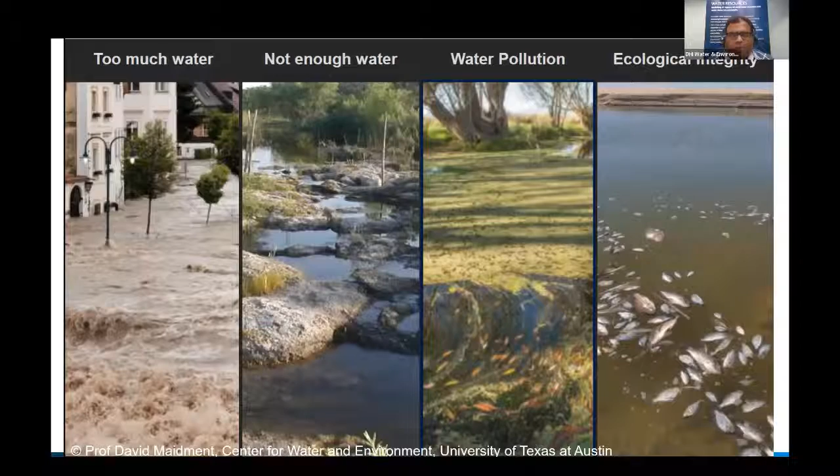There was even a study done in the USA where they found that cities generate about 10 trillion gallons of untreated stormwater - that's in liters almost 37 or 38 trillion liters of water, which is making its way into our receiving waters. All of this is untreated, entering our receiving waters. So there is a lot of pollution and contamination in our receiving waters, and we really want to do something about it.

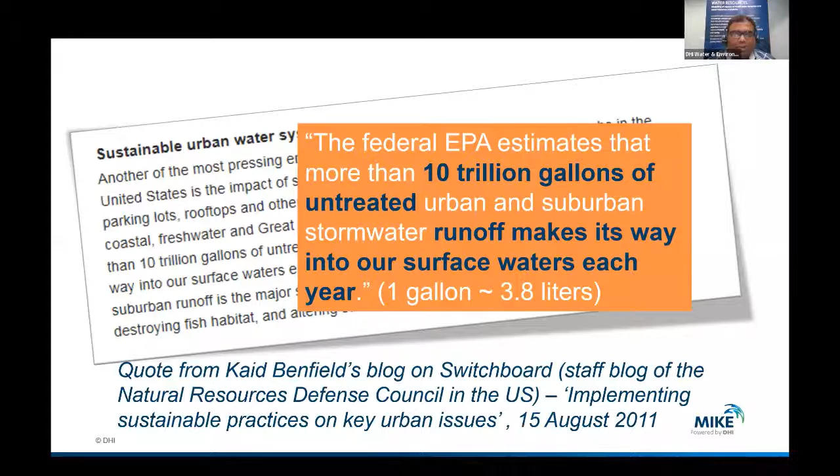That's what the whole topic is all about - what can be done to mitigate or reduce the amount of contamination entering our receiving waters. So when we talk about water sensitive cities, the term or the origin, we should go back to this particular framework. Many of you might be familiar with it.

For me, this has been very helpful when I started out working in this aspect of water resource management. Earlier, I was just looking into water quality and trying to do data analysis and modeling. But when I started looking further into where does water quality fit in the water resource management framework, how does it fit into managing city waters along with the green infrastructure assets, this was very helpful.

Over the past 10 years, whenever I have given presentations to ministries or even ministers, having this kind of framework gives a context to help them identify where their city or town is. In a few presentations I attended during conferences over the past 2 years here in New Zealand, I've observed that MFE keeps hinting that most cities in New Zealand are somewhere between drained city and waterway city. But what exactly are these 6 different city stages we are talking about?

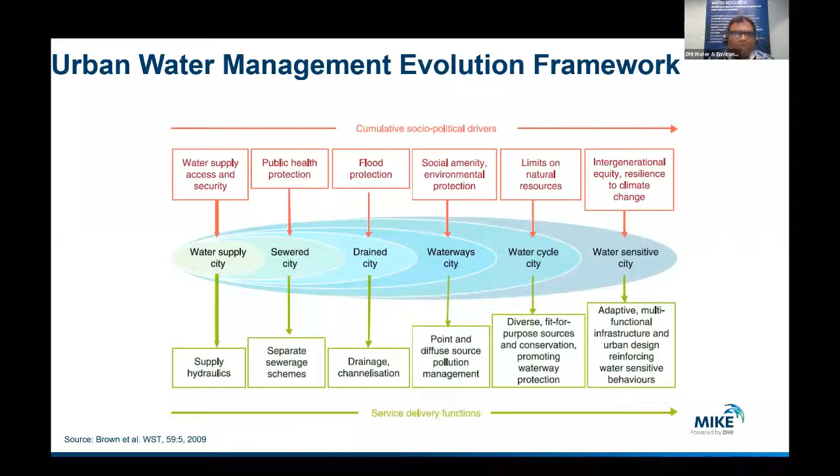Just to give context to those who are not familiar with this particular concept of urban water management evolution framework: we all start with a water supply city, in the sense that from villages, when we moved into cities, we need to supply water to all the residents living in the cities. That's the first focus. We have to supply water.

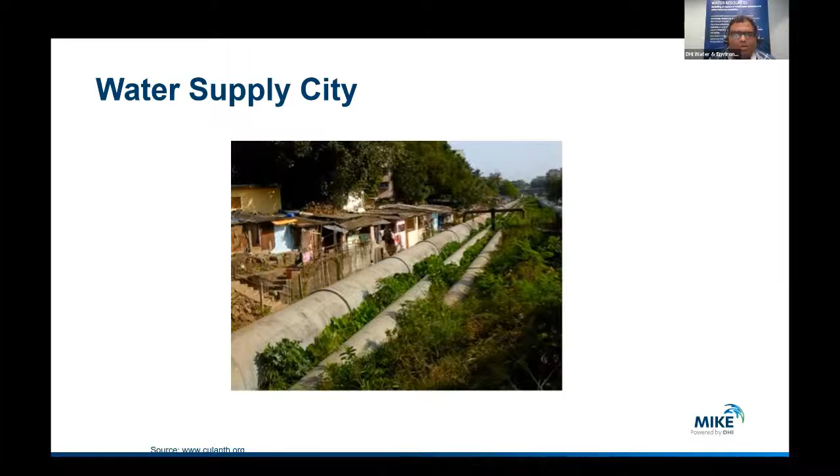But then the next question arises: yes, we are drinking all the water, but we have all this effluent coming out, what do we do with it? We can't just allow all the black water to enter into our roads and drains next to our houses. We've got to evolve it. We've got to think about the next stage.

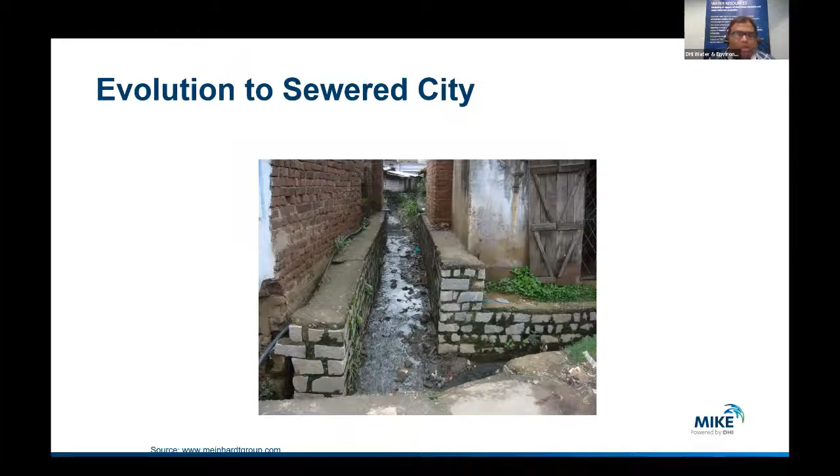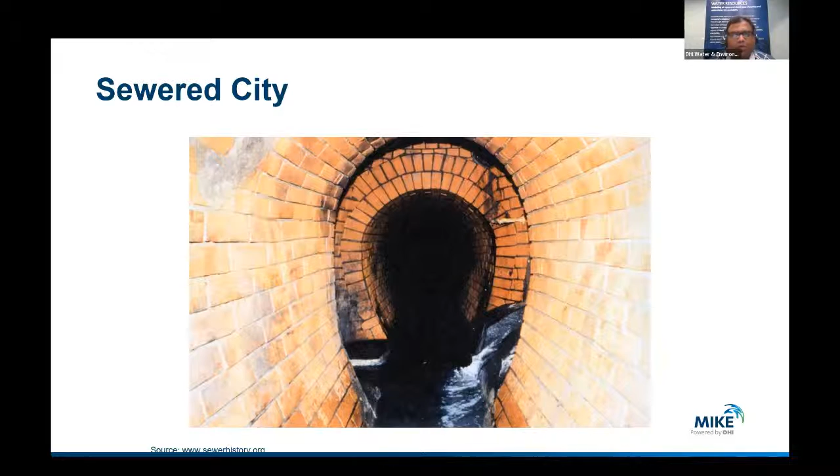And that's where the cities - and I have to tell you, most of the cities in Asia Pacific which I have encountered are still in this stage - they don't have proper sewage facilities. That's where they're concentrating all their efforts on the sewered city, because this is their big challenge, which they want to address before they move on to the next aspect.

And that's where the next aspect comes in. We're saying, okay, we have addressed water supply, we have addressed the sewerage situation, what's next? And what's next is what happens when there is storm water, when there are storm events and flooding on the roads, and how do you take care of that flooding. That's where the evolution takes place in the city councils and authorities - they start talking about addressing this flooding.

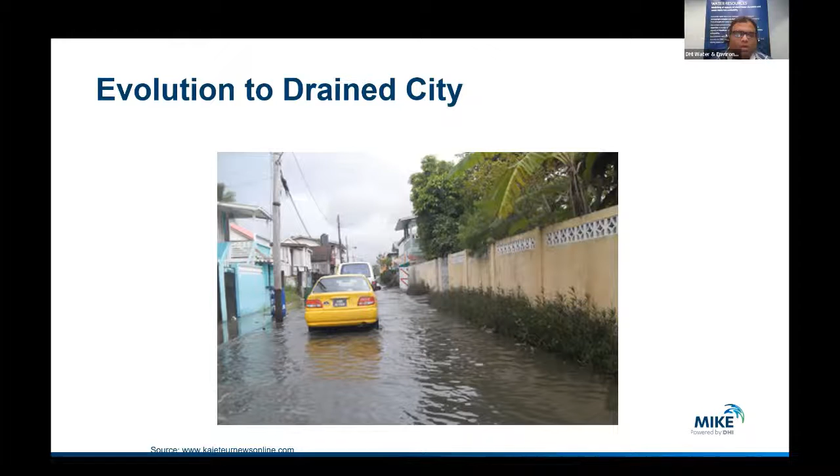For that, earlier, historically, when you had a lot of land, you could build these big canals or big open channels, so that they can be used for draining all the excess water. In Singapore, not too long ago, we had this formula that whatever rainfall falls on the ground has to be discharged away from the catchments within 3 to 6 hours, nothing more than that. So that used to be the mobilizing factor - let's build as many open channels as possible so we can take away all the stormwater from the catchment, so there is no property damage.

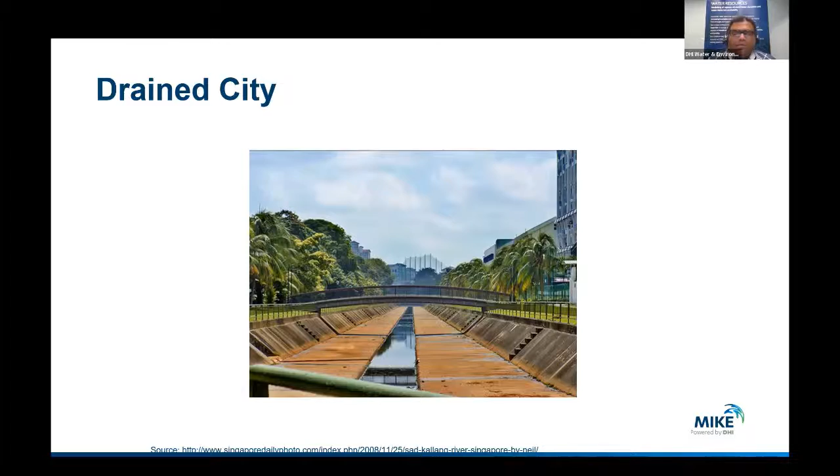But then you start to realize that you don't have storm events all the time. And the next thing is, when you do have storm events, these channels, some of them might not even be sufficient. So most of the time they're either just draining a little bit of water away from the catchment into the receiving waters, or in extreme cases they might overflow. With all this climate change happening, the number of these extreme events is increasing year-to-year. So how do you account for that?

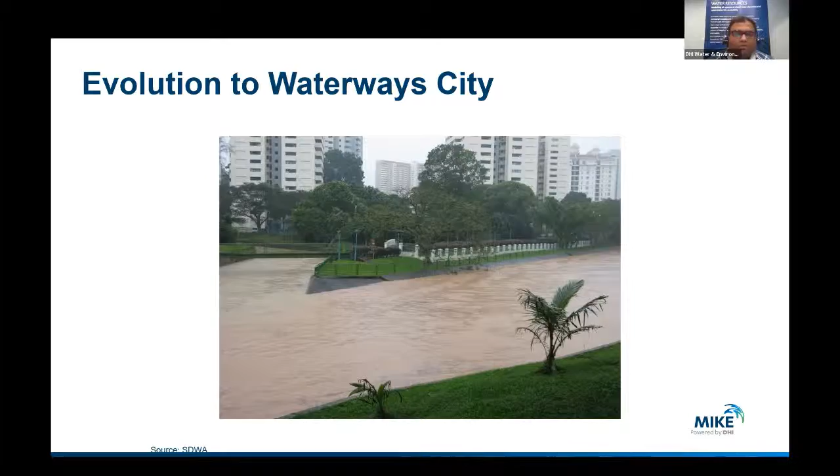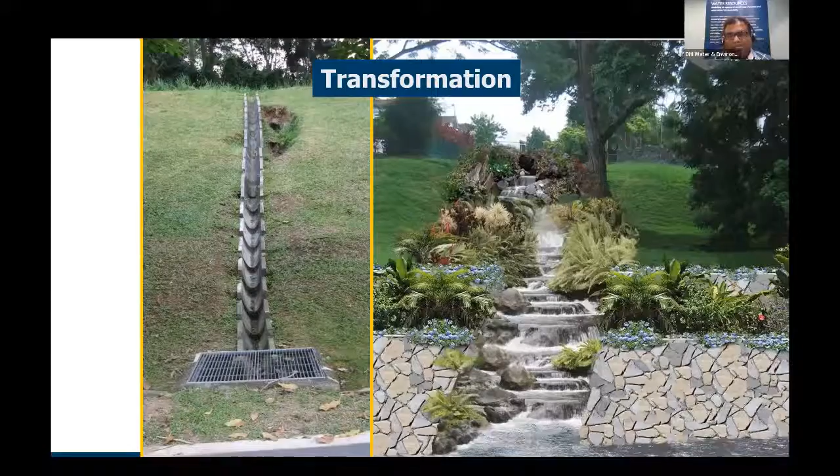That's where the evolution takes place to the next step, which is the waterway city. Lots of cities have been putting their efforts into this area, trying to transform their water drainage city framework into a waterway city approach, and hopefully to the next stages, which is the water cycle and the water sensitive city approach. In Singapore, more than $30 million, close to $40 million, was spent on trying to transform some of these canals under the water drainage concept directly into the waterways concept, where they can work as naturalized drains or naturalized rivers to allow the overflow and the water to get away from the catchment into the receiving waters, to allow infiltration, to make it as much a natural water cycle as possible, rather than from a concrete impervious point of view.

A few examples to share with you, and this can happen. So this evolution happens in every city.

Since I have some experience working in Asia Pacific, I'm sharing examples where in the 1960s you had this Grand Canal in the middle of the city, pretty much working like a sewerage canal. This was in the 1960s when the city wasn't much developed, and that's where the whole evolution shows how it can happen.

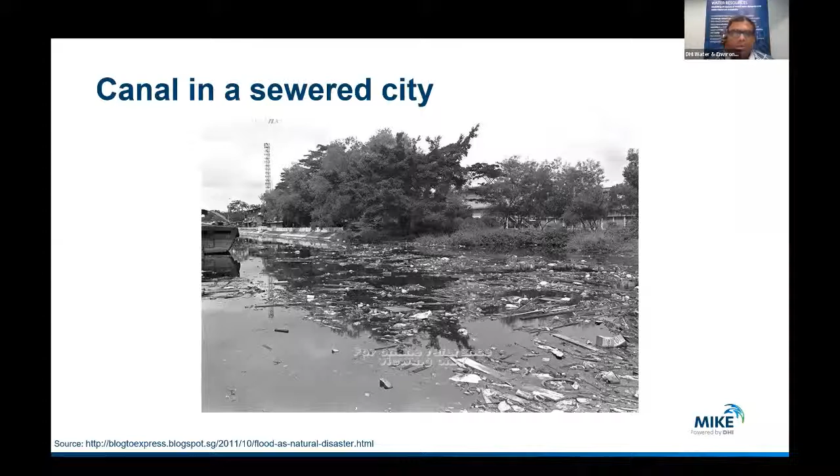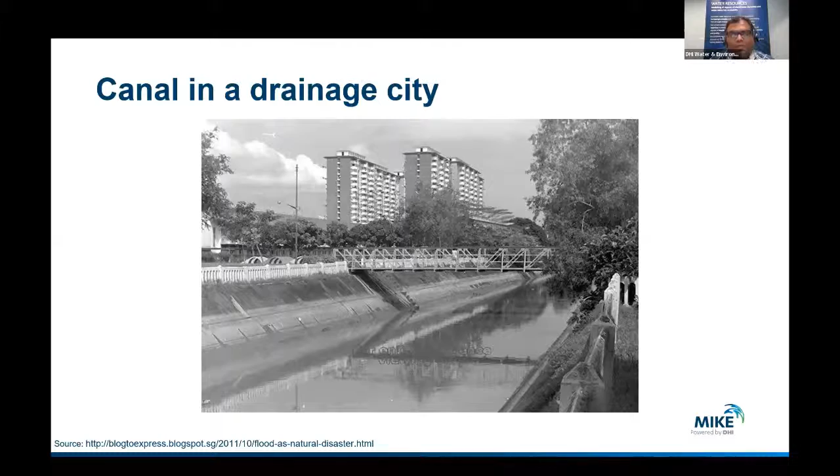So from a sewerage city, when the government authorities decided to move on to the next step, they cleaned up this canal into something useful for stormwater conveyance or as a pathway. That's where it became a drainage city. By the 1980s or early 1990s, they wanted to move on to the next step, focusing their infrastructure efforts on evolving it from a drainage city into a waterway city. You can see the transformation happening.

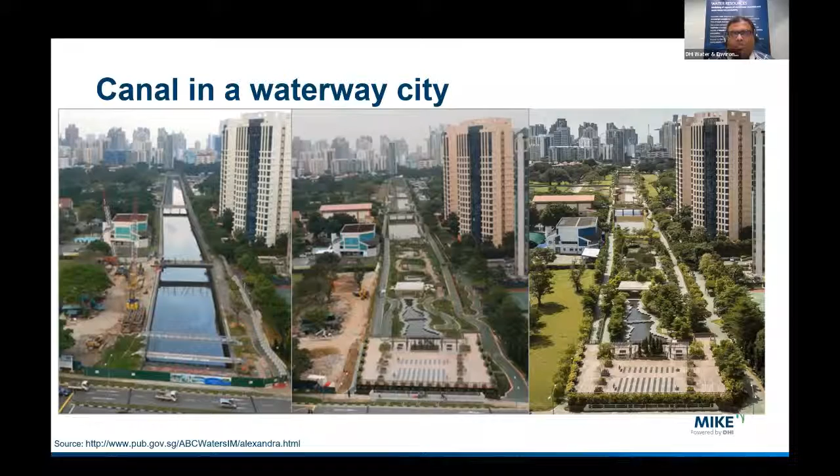So the next question is, how do we go from this waterway city to the next stages: water cycle and water sensitive cities? Something like this, where you have more amenities, more ecosystem services, where the aquatic ecosystem interacts with human health, where humans ensure the catchment is free from pollution. We recycle a lot, we don't allow pollutants to enter our waterways, and we enhance natural infiltration, basically reducing the effective impervious area in the catchment.

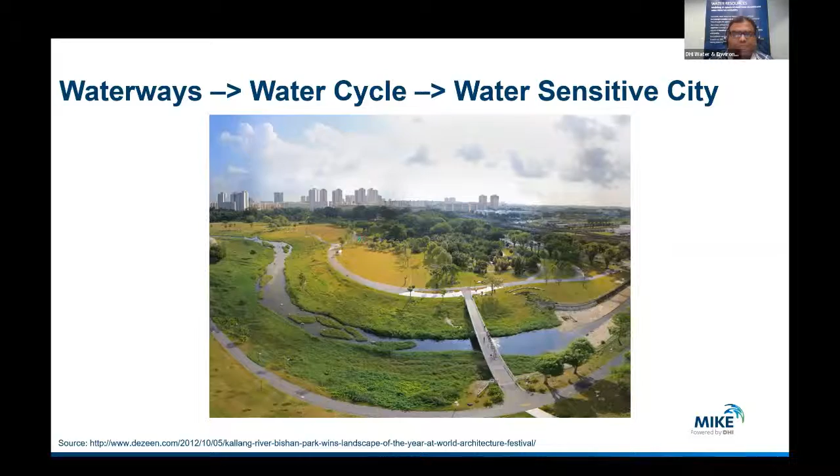So all these aspects come into play to evolve to the next stage, the water sensitive city. If you go to the CRC website in Australia for water sensitive cities, they give a nice definition of what a water sensitive city is. It's basically a city that can act as a water supply catchment. That means you're not just talking about a stormwater catchment, but a potential water supply catchment, so the water must be of reasonably good quality.

It could be used for primary recreation purposes like swimming and kayaking. It also talks about a water sensitive city having waterways that provide ecosystem services and a healthy natural environment, in addition to mitigating flood risks, enhancing the health of waterways, and economic prosperity.

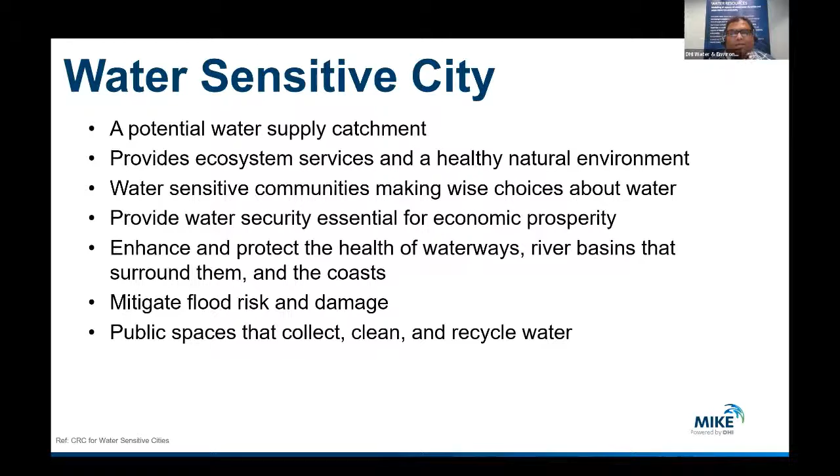Since I come from the water quality background, I'm going to filter these features of a water sensitive city from the view of a water quality practitioner. I hope you can forgive me for that. If you're looking for social, economic, or flooding related aspects of water sensitive cities, I'm not the person to talk about that. But from a water quality and ecological perspective, I can work with you on this.

From a water quality perspective, what principles should be used? I think this Australian terminology of water sensitive urban design is really more like a philosophical framework rather than an alternative to LID or BMP or green infrastructure.

I really like their approach to design principles for evolving your city from a waterway city into a water sensitive city, where principles involve protecting your water ecosystems, improving the quality of discharged water into urban receiving waters, integrating water amenities to provide ecosystem services in terms of water quality and ecology, improving ecological values, and utilizing land spaces for multiple purposes rather than just aesthetics, recreation, or water retention, integrating all these ecosystem services together.

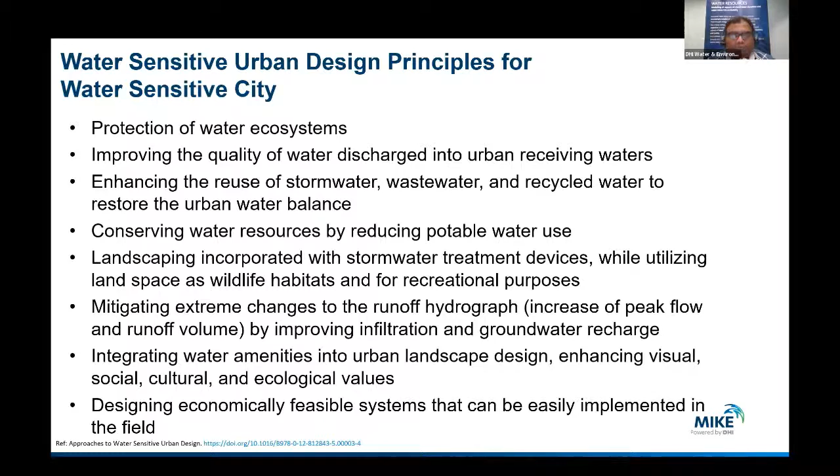So these principles promote that kind of framework, and I think that's really great. I'm sure most of you agree with that as well when you dig deep into it.

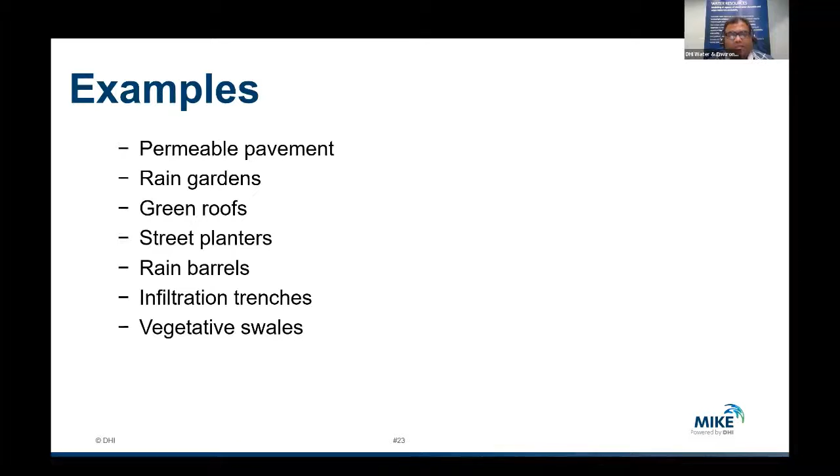As part of this framework of water sensitive urban design principles, all over the world lots of different types of examples have cropped up, like permeable pavements, rain gardens, green roofs, planters, barrels, swales and trenches, and stuff like that.

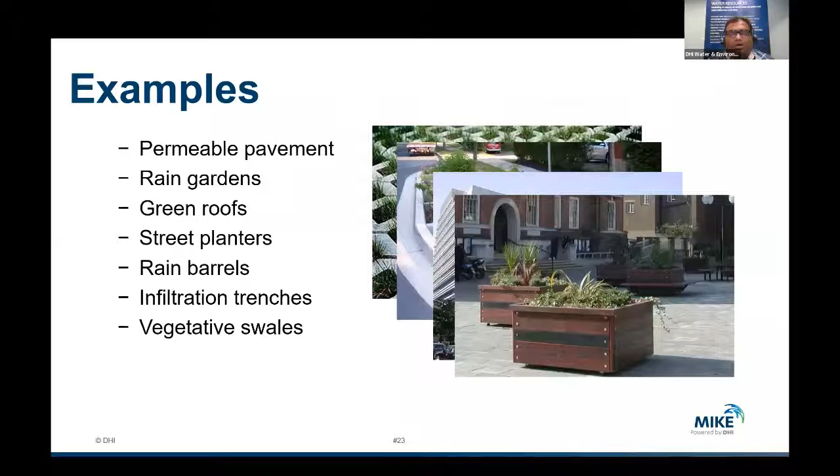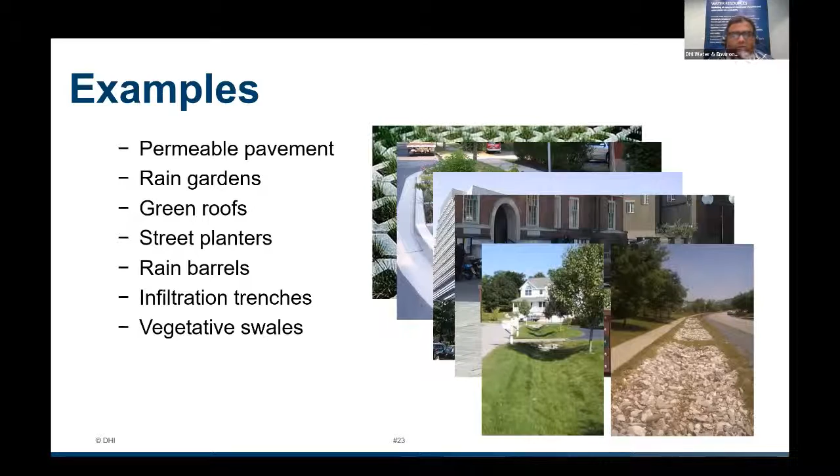Either you can use them independently, or you can use them as a set working in series, so that you can have multiple interventions for your stormwater to go through the cleansing process. I think that's really great if it can happen. This is an example of a treatment train in London.

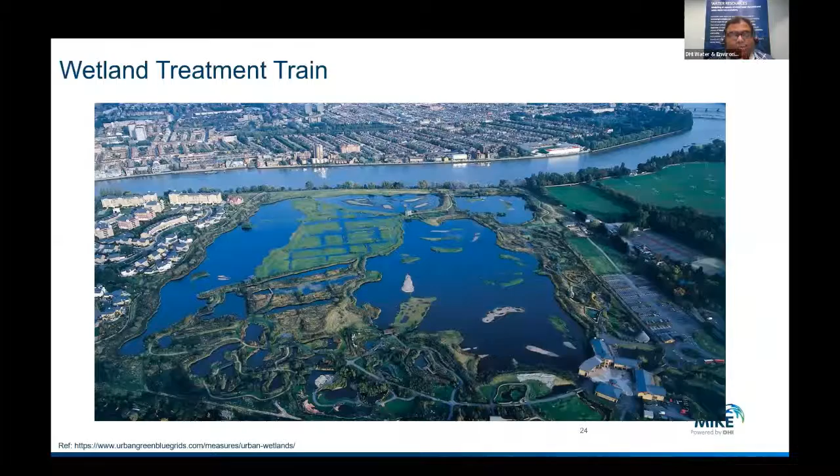Something I am intimately familiar with is this cleansing biotope, also working as a wetland treatment train back in Singapore, where we had a hybrid of bioretention basins and wetlands. It really helped improve the whole aesthetics of the park, the waterway, and the pond surrounding it.

Before the whole process started, we had a highly eutrophic pond with chlorophyll biomass of more than 400 micrograms per liter. After implementation of this wetland treatment train, cleansing biotope approach, we got concentrations of chlorophyll less than 10 micrograms per liter. That's a great achievement over the years, considering we're not going through any kind of membrane filtration or something of the sort - it's just pure natural treatment of water.

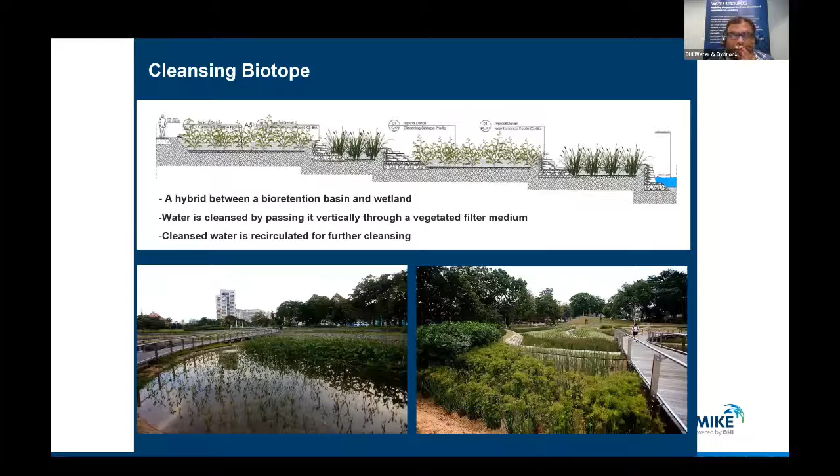There are multiple benefits for having such a wetland treatment train option. In addition to improved water quality, we can reduce costly flood events, alleviate downstream erosion, improve stream habitat, and even help with the urban heat island effect from urbanization and density increase. It also improves groundwater recharge, and for cities suffering from paucity of rainfall, it can act as a rainwater harvesting option since it retains water on site.

As you remember from previous webinars, when I talk about features, I try to bring in equations, because I think it puts a good perspective rather than just talking wishy-washy about how great wetlands are to help your city evolve from waterways to water sensitive. It would be nice to put some numbers to it.

As you know, I'm a big fan of mass balance, so I always see it in terms of these mass balance concepts. Say, for example, we take this particular treatment train approach where we divide it into multiple tanks for a numerical analysis case, and we assume how much water is flowing through the system and what concentration is there.

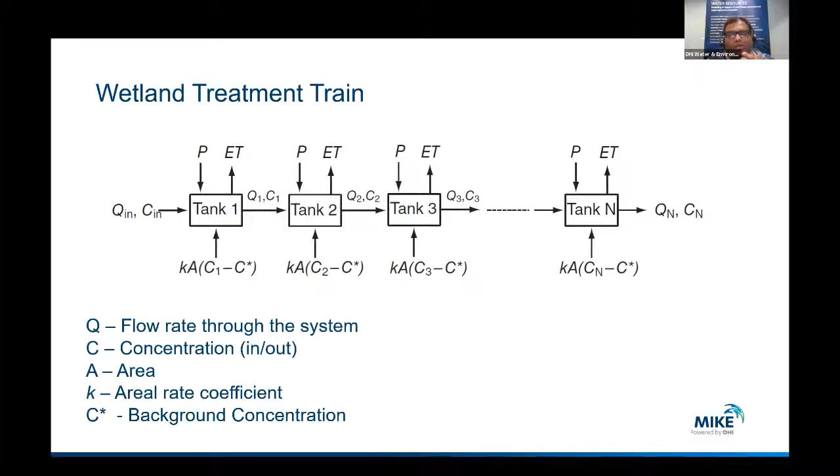Based on the background concentration from the area, we can calculate and compute the concentration coming out - either in a steady state basis or a dynamic situation. Through simple mass balance, you obtain equations that tell you the flow and concentration in the previous tank compared to the next tank, and the effluent concentration compared to the influent and background concentration.

Say you have an example: you want to treat 1 million gallons per day of water coming from your catchment, and it is highly polluted, containing phosphorus at very high levels. It should be less than 1 milligram per liter according to guideline values, but for this example it's 5 milligrams per liter, and you have background data in terms of rainfall, evapotranspiration, infiltration, and all that.

You really want to know whether this particular 20 hectare area, which you think could be assigned for a wetland treatment train, would be effective in reducing your phosphorus levels from 5 milligrams, and how much reduction you can observe.

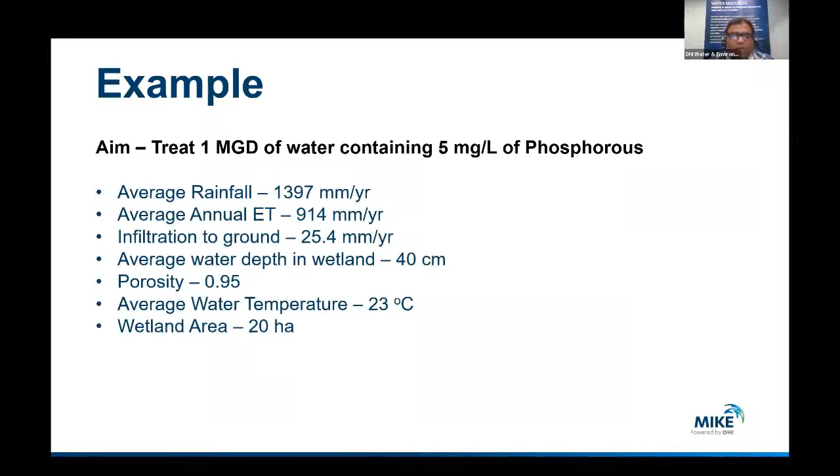If you want to bring it further down, you can play around with the design and identify whether you need to change the area, change the water depth in the wetland, or increase the porosity or something of that sort. All these things are possible.

That's what I wanted to share in this webinar: by having a wetland treatment train approach, we can carry out a simple numerical mass balance approach to understand how much contamination reduction you can get in your city, in your catchment.

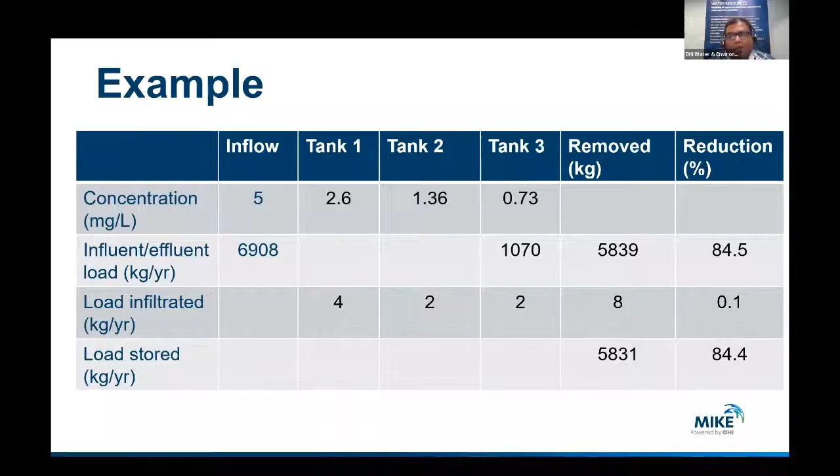We can also do this in a dynamic sense, and Mike software does allow for that. You can apply water sensitive urban design systems at 2 different levels: at a catchment level if you want to assess the required efficiency of your targeted systems, or at a detailed level where you want to put in a specific water sensitive system and do the hydraulic assessment and water quality assessment of that particular device.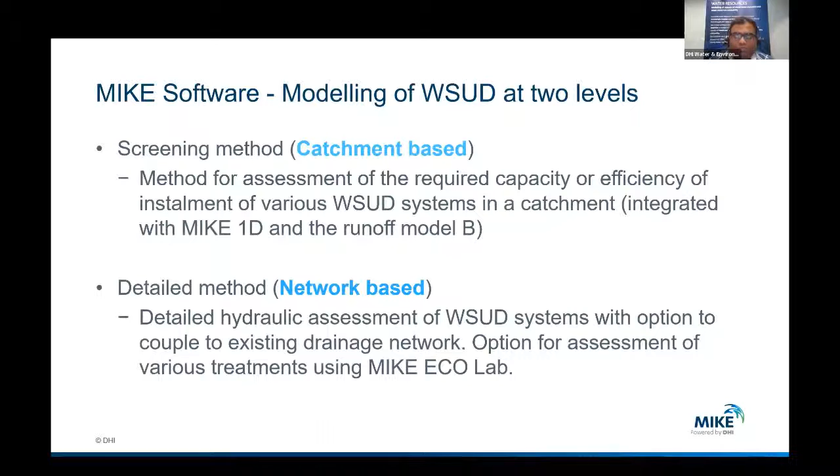Both are possible, and they can be done using Mike software at the dynamic level rather than steady state. Some of the Mike software developed over years for discrete purposes can be integrated together to solve where we should site the green infrastructure, how effective it would be, how much improvement we can get, and how much the receiving environment can benefit from having these kinds of green infrastructure in the catchment. I think all those questions can be solved by integrating Mike She and Mike Urban software.

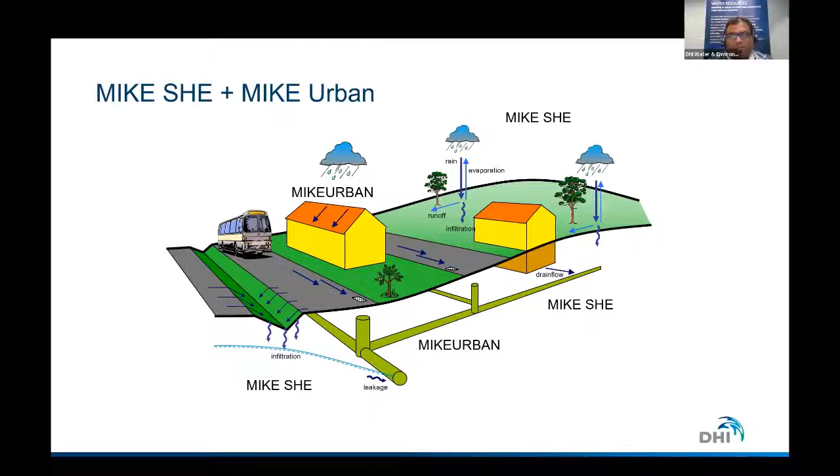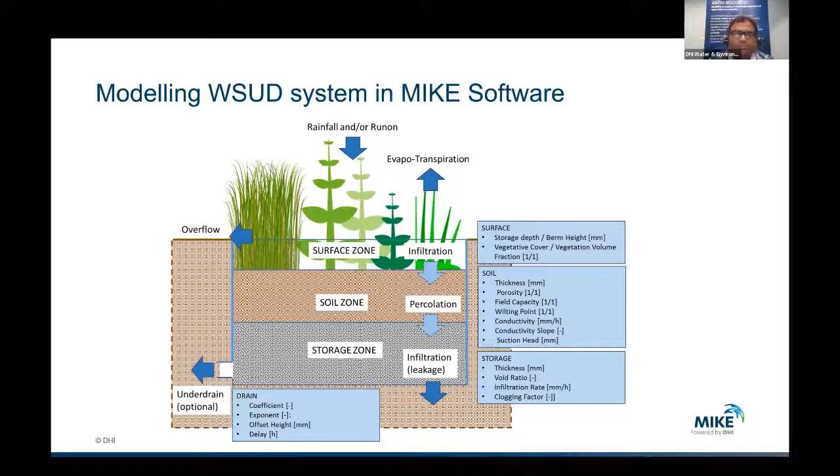This is just a representation of how a water sensitive urban design system could be implemented in the Mike software, because it allows for different features like infiltration, percolation into the ground, leakage into the ground, and evapotranspiration to be modeled as part of your modeling system, whether catchment-based or network-based.

Summarizing, since we're running short of time, wetlands are a great opportunity for us to evolve from a water-based city into a water-sensitive city. They offer lots of advantages. Either you can use a simple mass balance approach to determine how much reduction you can get in your contaminants, or you can use dynamic approaches, for example using Mike software, to run the whole thing.